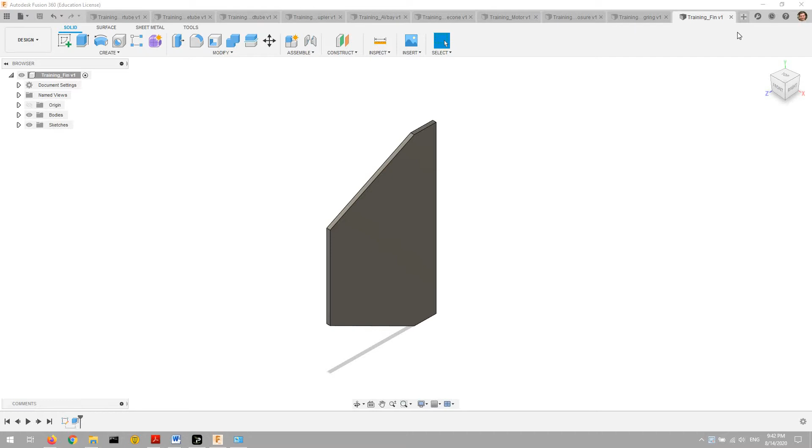To do that, we're going to create a new design by clicking this tab here. Before you can start assembling, you're going to have to save the design. So save, and I'm just going to call it training assembly. Just make sure that's in the right folder, and save.

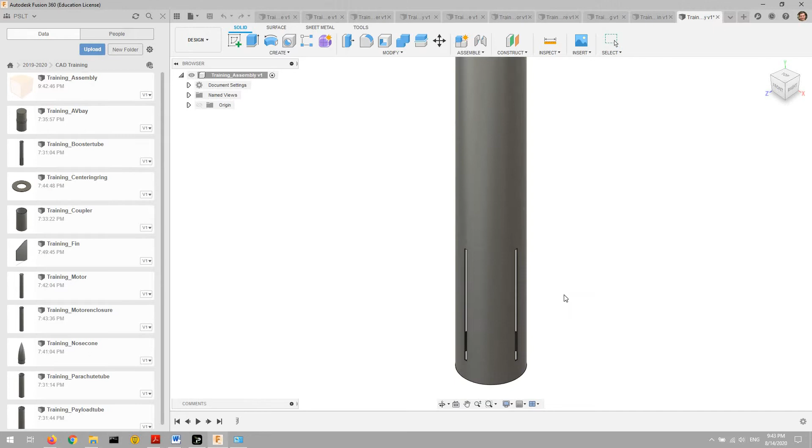Now that you have your assembly saved, you can start dragging parts into it. The first one I'm going to drag in is the booster tube. So just drag that in there. And there we go, that's going to be sort of my base. Now I don't really have to do anything with that.

So I'm going to start dragging in some more things. The next thing I'll drag in is the training motor. See how that spawned right in the center, right where we want it to? That's because I had these oriented both coming off of the top plane and at the center of the top plane. That's why I like keeping things according to a consistent orientation.

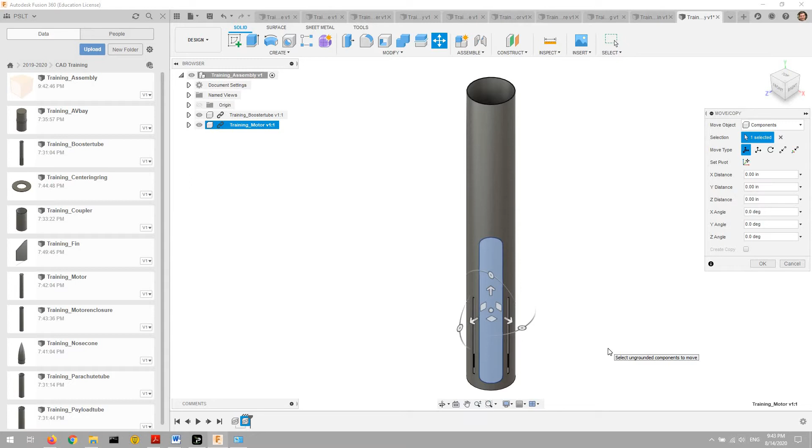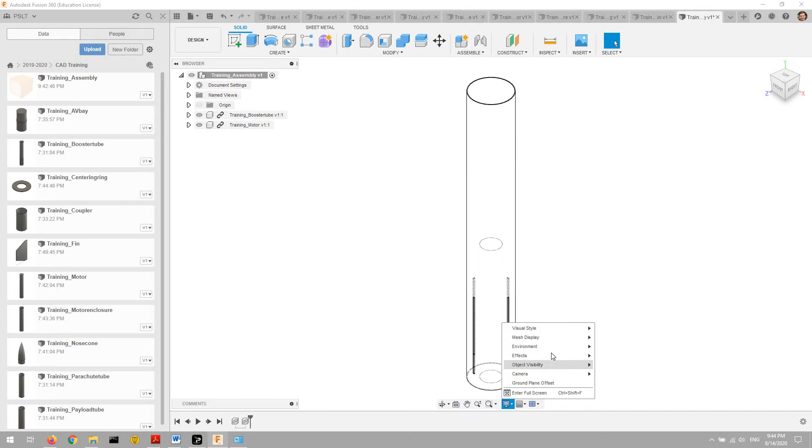So I can just press OK. If you want to see inside, you can actually change your display settings and visual style. Instead of shaded with visible edges only, you can do wireframe with hidden edges. Actually that doesn't give me quite good enough, so I'm going to say wireframe. And there we go.

Now we can see the parts that are in there so far. Next, I'm just going to pull in the motor enclosure, and that spawned right where it was supposed to.

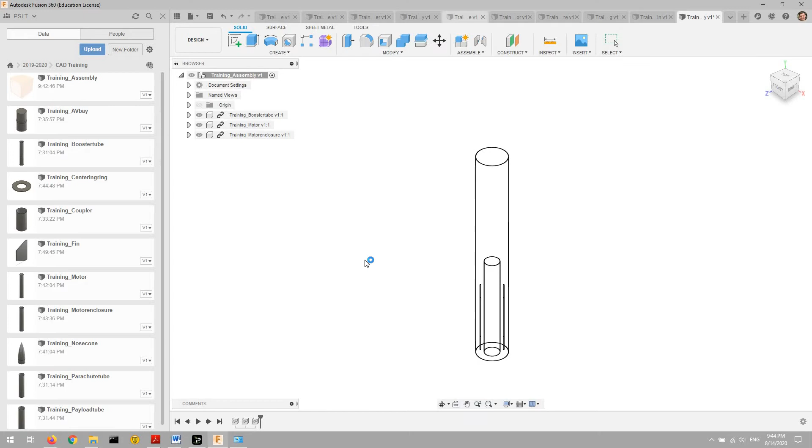Now, for something a little bit more fun, I'm going to drag in the Avionics Bay. That'll spawn right there, and I don't want it to be there, so I'm going to move that up to the top of this booster tube.

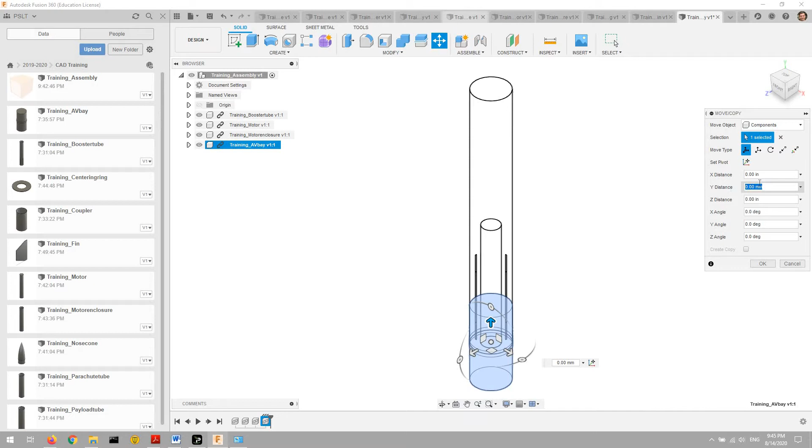Now remember that booster tube is 45 inches, and the ring around this Avionics Bay is half an inch. So that's the Y distance, so I'm going to reset that back and then say 45.5 inches, not 455.5. And there we go, that just moves it up to where we want it to be.

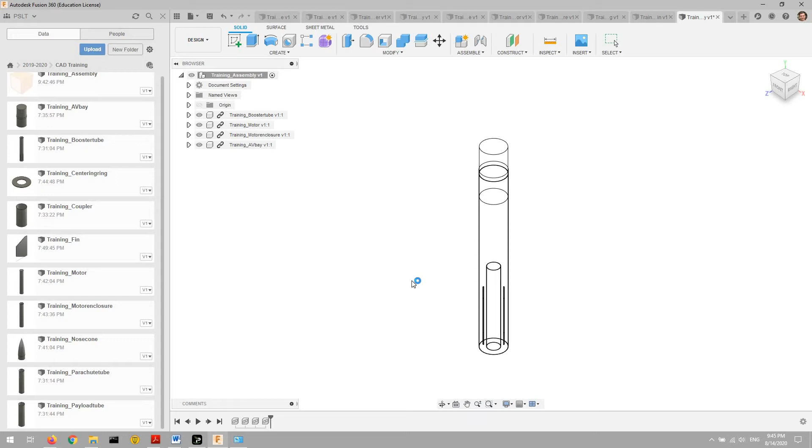And now we can move our parachute tube in, and let it load. Sometimes it likes being a little slow, and you'll just have to deal with that. There we go, and move that up to where it's supposed to be.

So just Y distance, 46 inches, and that moves the bottom of it to right above the center of the Avionics Bay.

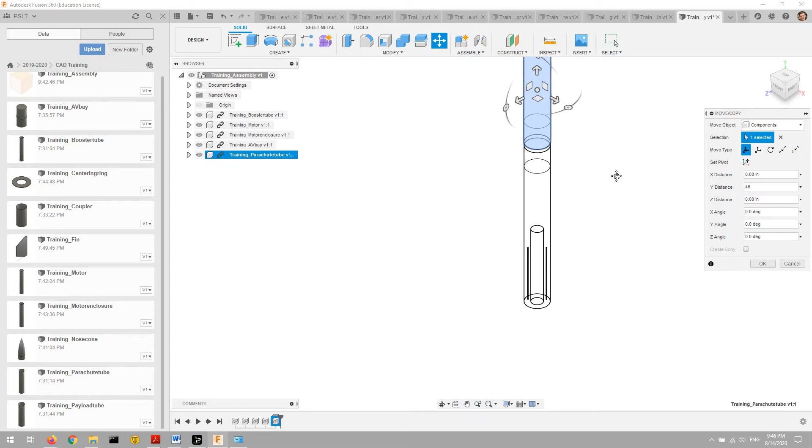Okay, now we've got our booster section. Let's add the coupler, if I can find it. There we are.

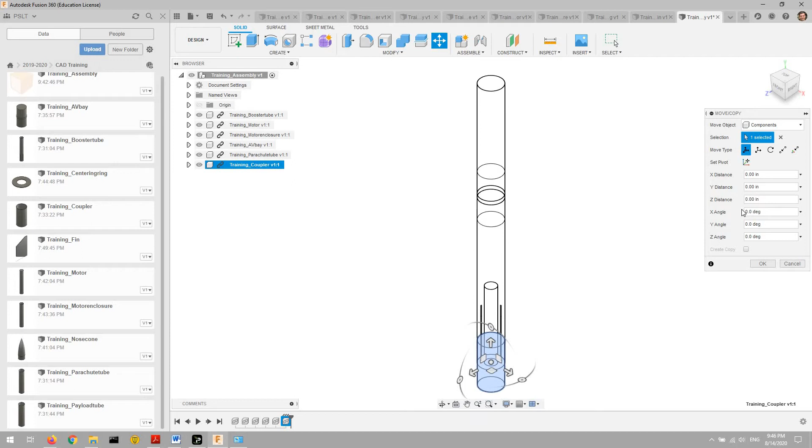And remember, we set the center of that to be, think about it as sort of the point from which we're moving it. So that's 30 inches plus 45 inches plus 1 inch, so that's 76 inches. Sorry, brain's a little frazzled at the moment. So 76 inches, that moves it right to where we want it to be.

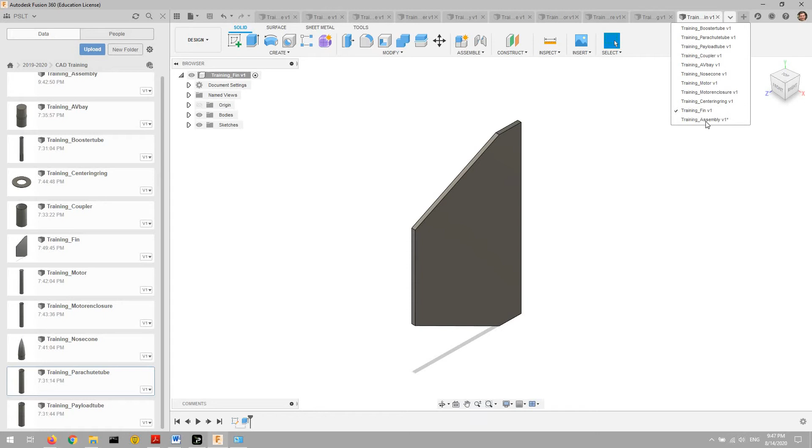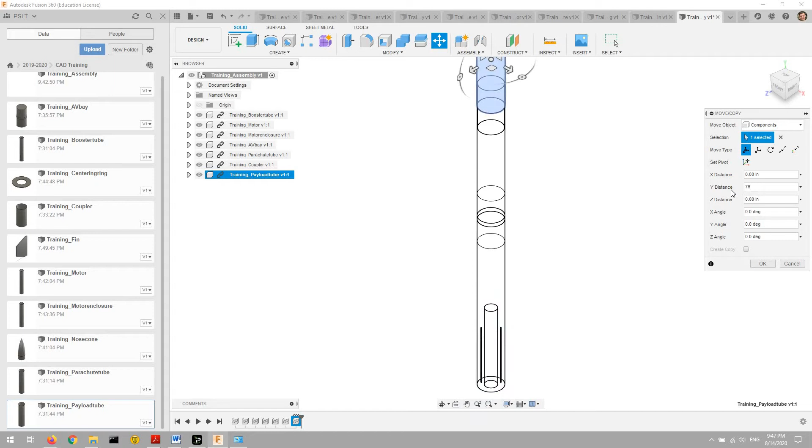Then move our, not parachute, sorry, get back to the assembly there. Payload tube. Drop that, and then pull it in. And then move that right to the same spot that we moved the center of the coupling tube to, so 76 inches. And that brings the base right up to there.

And now the nose cone, drag in. And since the base point from which we're moving the nose cone is the bottom of the bit that sticks up out of the payload tube, we just need to add the heights of the booster plus the parachute tube plus the payload tube plus the switch ring. So that would be 45 plus 1 is 46, plus 30 is 76, plus 25 is 106. That's not right.

101. I added 5 somewhere. This is what happens when I don't get enough caffeine in a day. Sorry about that. So, 101 inches.

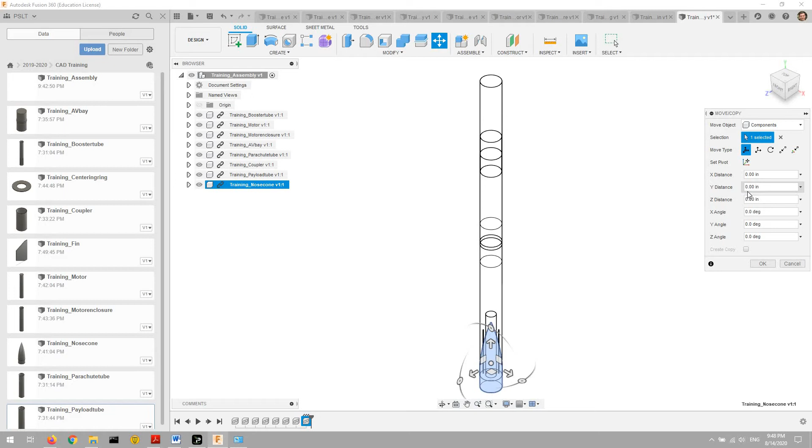And there we go, that goes right to the top of the payload tube. And now we've got the bits on the outside and the bits joining them together.

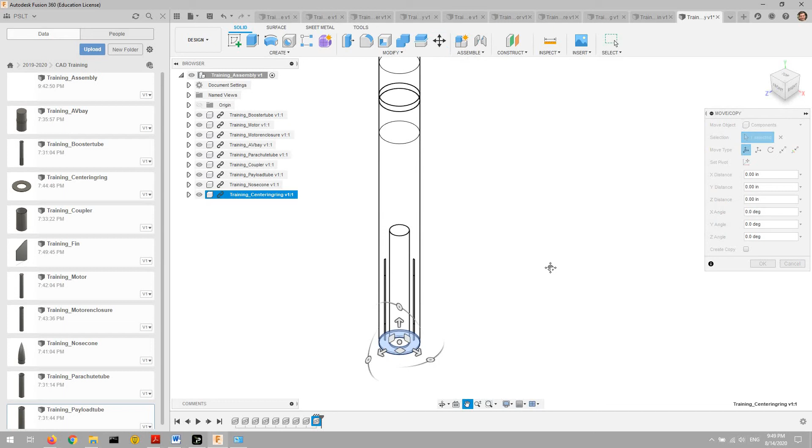And now let's add the centering rings. The first one is going to be right at the bottom of the fins, so it's going to be 1.75 inches up, because we just want the bottom of it to be flush with the fins. So, 1.75.

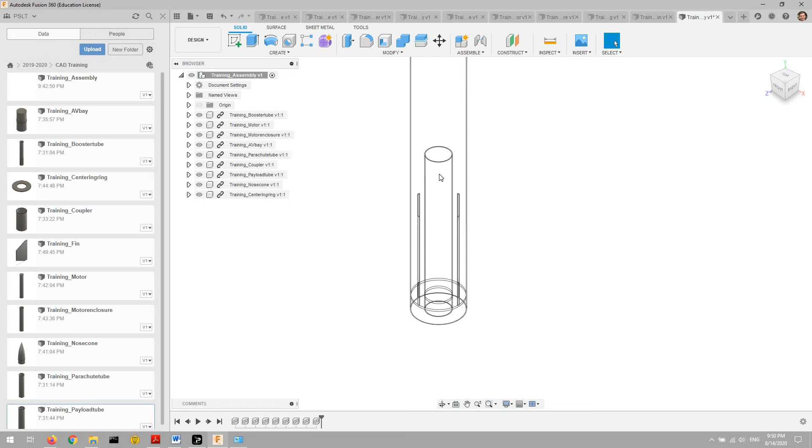And then the other one we want the bottom of it to be about 2 inches from the top of the motor tube. Motor tube is 53 centimeters, so that's about 20.87 inches, and then minus 2, that's 18.86614173 inches. So let me just pull that in and get it there. 18.86614173 inches. And there we go.

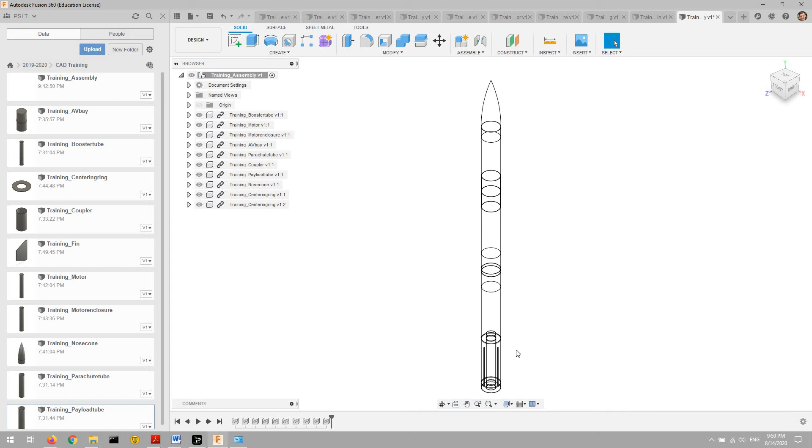Now the bottom of it is 2 inches from the top of the motor tube, and the top of this one is 2 inches from the bottom of the motor tube. And now for the fins.

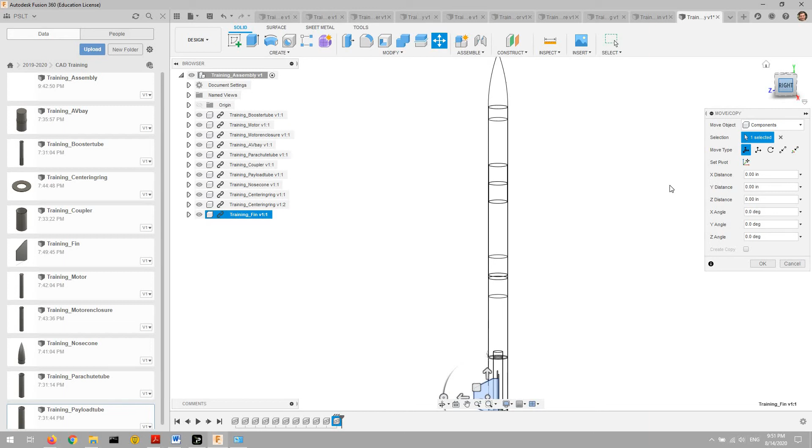The fins are a little bit screwier, but not a whole lot. So let's view this from the right. Firstly, we want to move it up 2 inches. And now, let's see, is that the X direction? No, it's the Z direction. So we want to move it from the center, the width, or the radius of the motor tube enclosure. So that will be 1.522007874, and now you see it's flush with the motor tube enclosure.

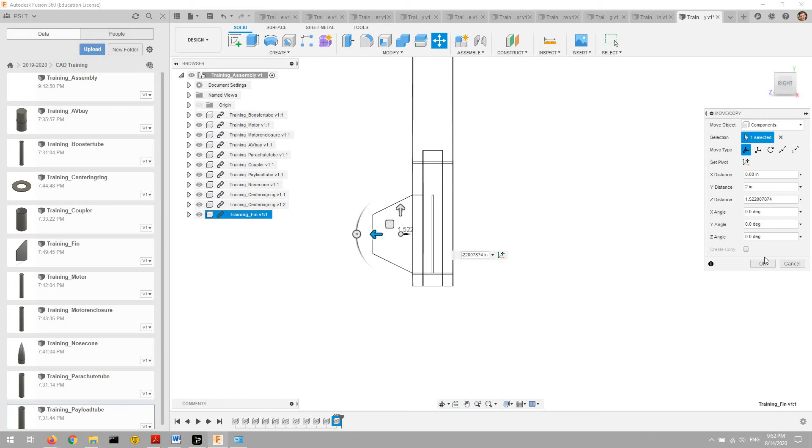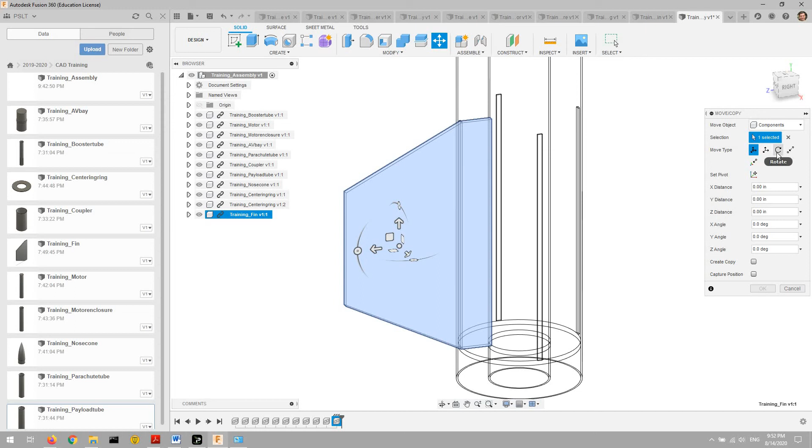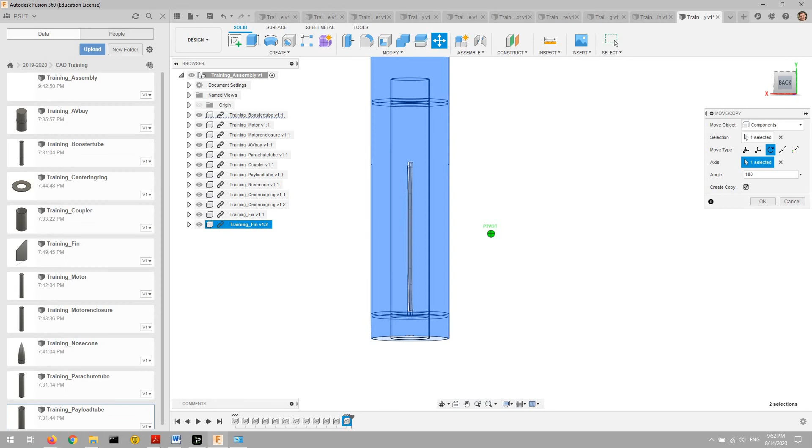All right, and now to duplicate that around the motor tube, we're going to click Move Copy, select Component, select that fin, rotate and create copy, select axis, and we'll just click any one of these parts that are circular, and 180 degrees. And there, now you see it has created a copy that is 180 degrees.

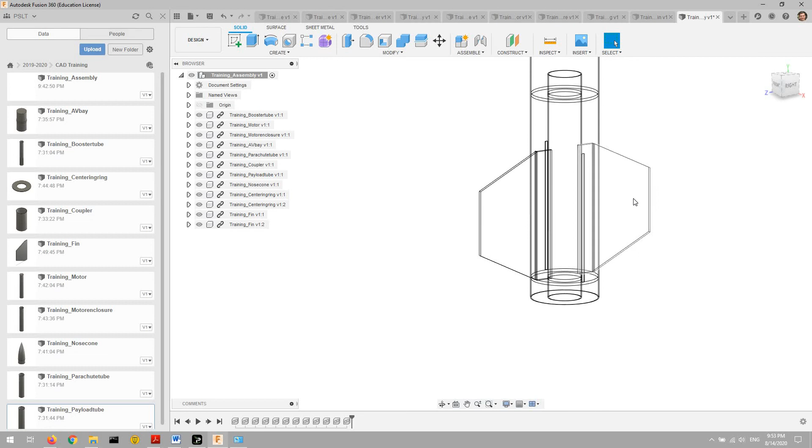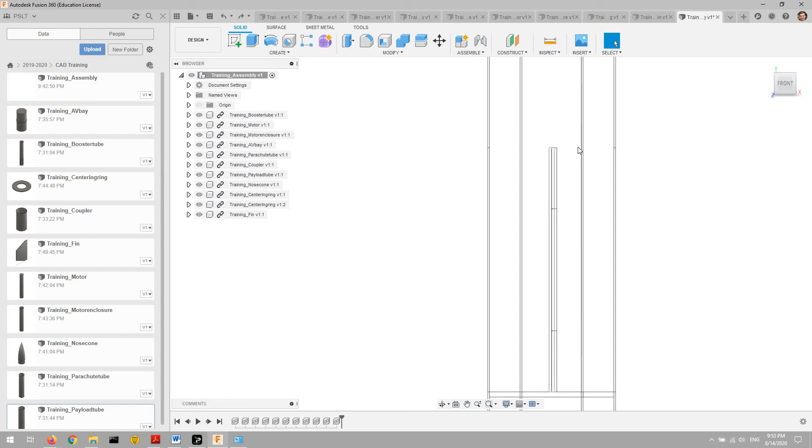And now I just remembered something, which it's good that this happened in this video. So I don't know if you saw or not, but there is a gap between the edge of the fin and the edge of the fin hole. That's because we constructed the fin from the front plane and didn't do it symmetric. That was just a brain fart on my part, but it's not that hard to solve for.

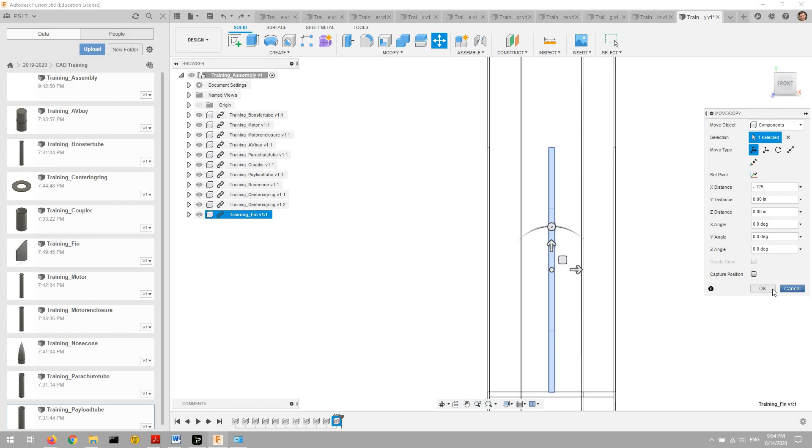Just click it, select move, component, select free move, and that would be X distance, and that will just be, I believe, -0.125 inches, and there we go. Now it's perfectly nestled in its little hole.

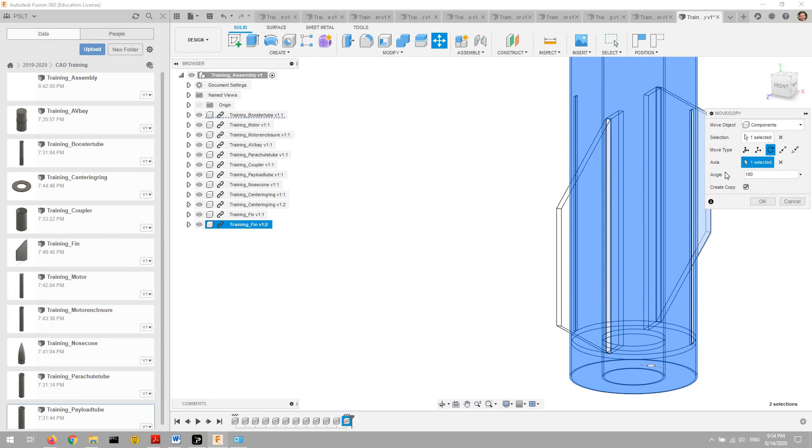And now we can do the rotate trick to create a copy. So components again, choose the fin, rotate, create copy, axis, any of the circular parts, and 180 degrees. And now that should be flush with the hole that it's supposed to be in. Front view, here we are. Yep, that's perfectly where we want it to be.

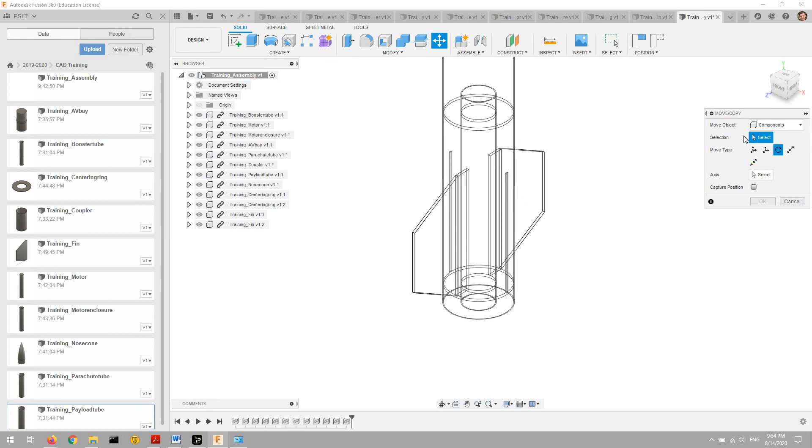And now we just do that again. So components, and select both of these, create copy, axis, any of the round parts, and 180... not 180, 90 degrees, what am I saying. All right, there we go.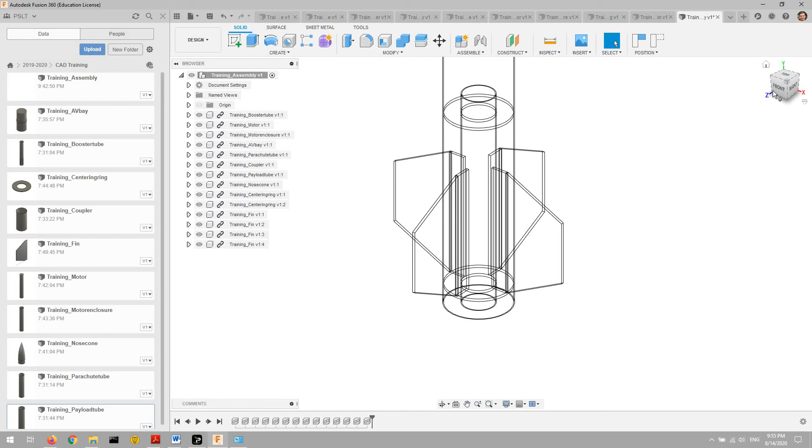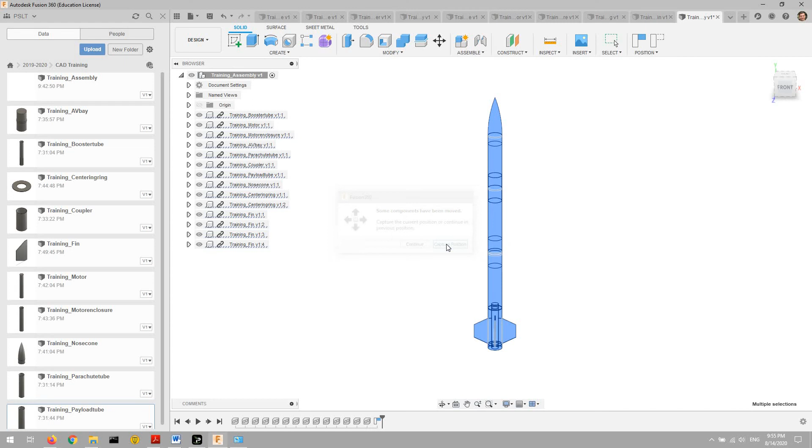And now we have all of our fins, all of our parts are in the assembly, and just to make sure they don't go anywhere, I'm going to select all of these, click Assemble, and create a rigid group. So capture position, components, 14 selected, and OK. And now we've got a rigid group, and everything is where we want it to be.

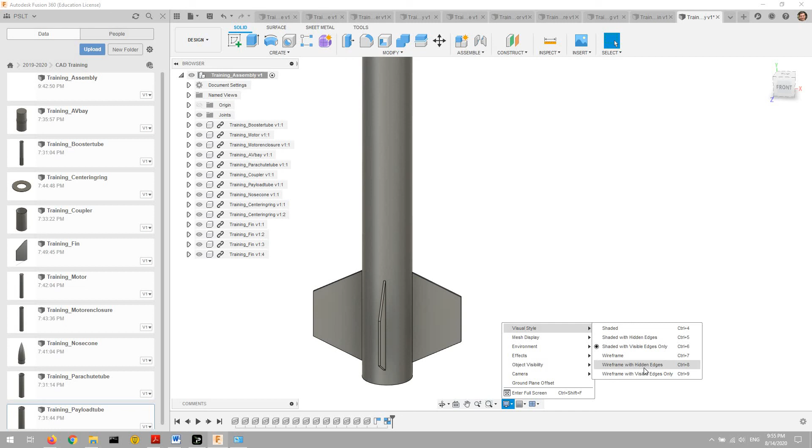Change the visual style back to shaded with visible edges only, and there we go. There's our rocket. Now I'm actually going to go back to wireframe, just as it's easier for me to make sense of things like that.